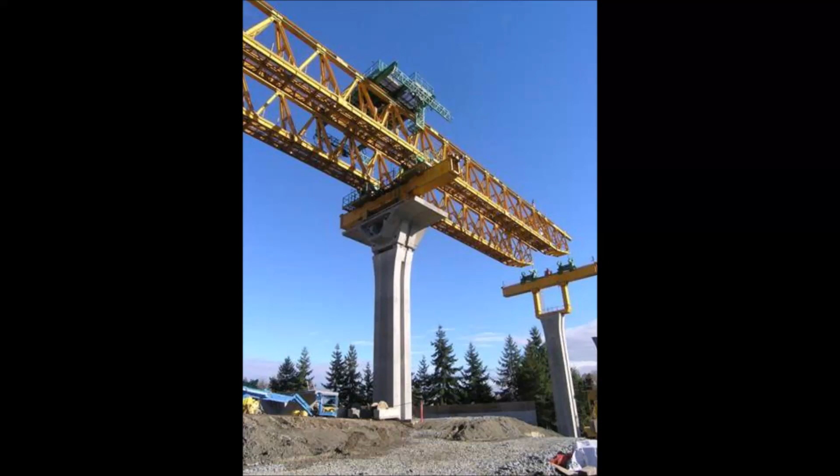We've built a lot of projects in this region, but never have we seen anything this dramatic on a day-to-day basis. That's the quote from Sound Transit Board Chair John Ladenburg, talking about the first precast segmental project in Washington State history, as well as the longest elevated roadway in the entire Pacific Northwest, coming in at 24,746 feet.

So PCL turned to a form of ABC, accelerated bridge construction, and they chose a self-launching gantry, which was the first time it's ever been used in the entire region.

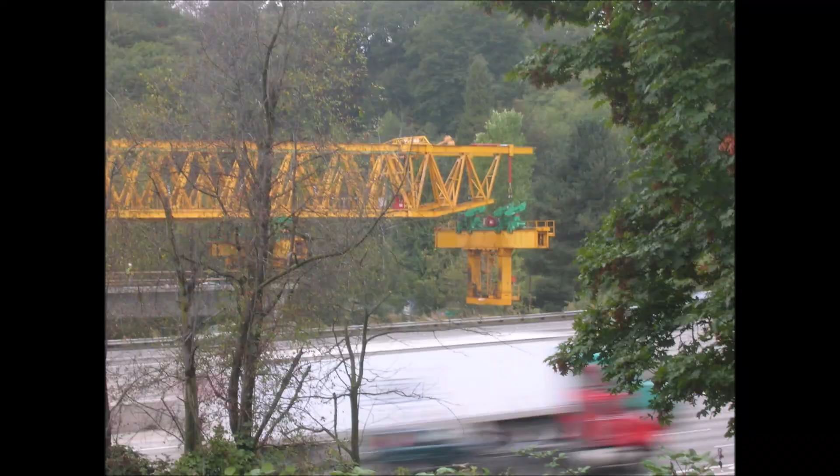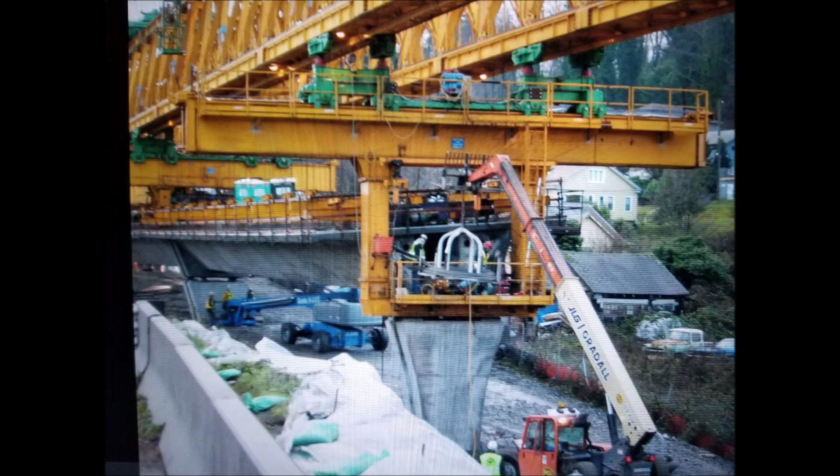The actual crane came from Italy. It came in 38 shipping containers, put on a cargo ship, and shipped across the Atlantic. It weighs, when it's all assembled, 500 tons, it's 375 feet long, 44 feet tall, 20 feet wide, and it can lift up to 80 tons.

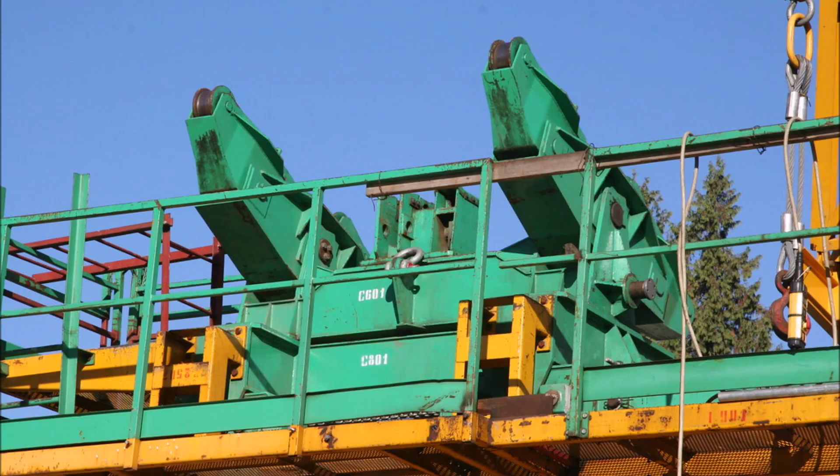PCL was awarded the contract with a bid of $231.7 million, which seems like a lot of money, but it's actually $40 million less than their biggest rival, Peter Kiewit, and 10% less than the estimates of the Sound Transit engineers.

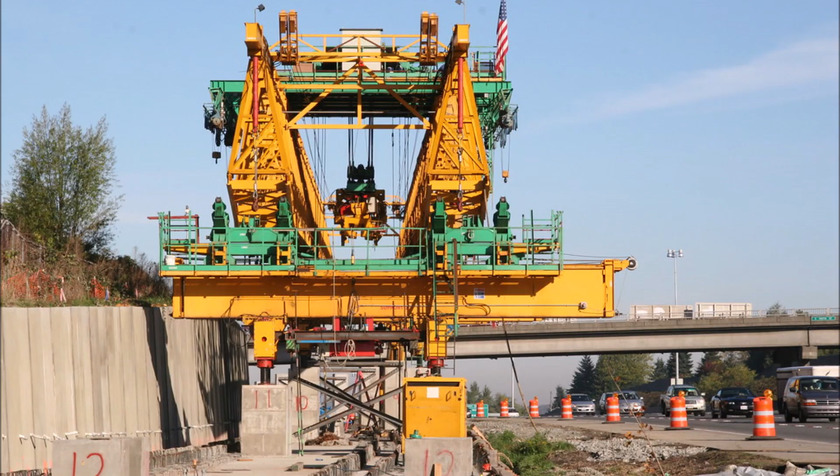T.Y. Lin, engineer, designed this thing with the typical 120-foot spans, which is simply 12 10-foot wide precast segments lined up and stuck together from column to column. So when the whole thing was up, it started walking across 170 columns, some of them as high as 70 feet, all along the 4.2-mile stretch between Tukwila Station and Rainier Beach.

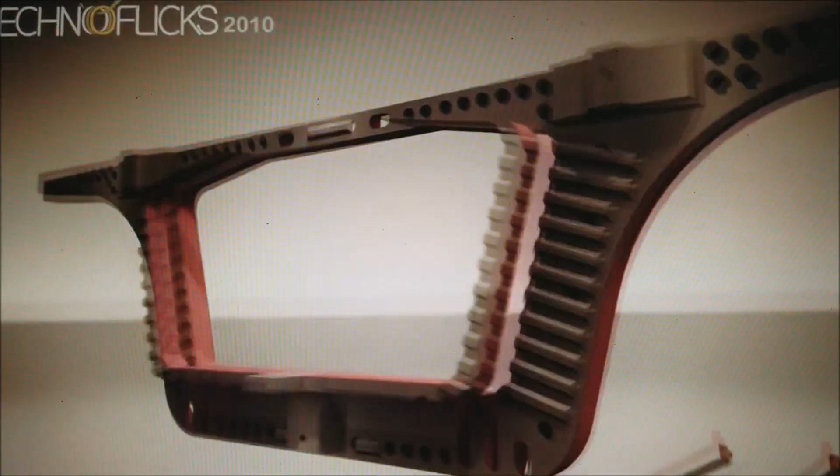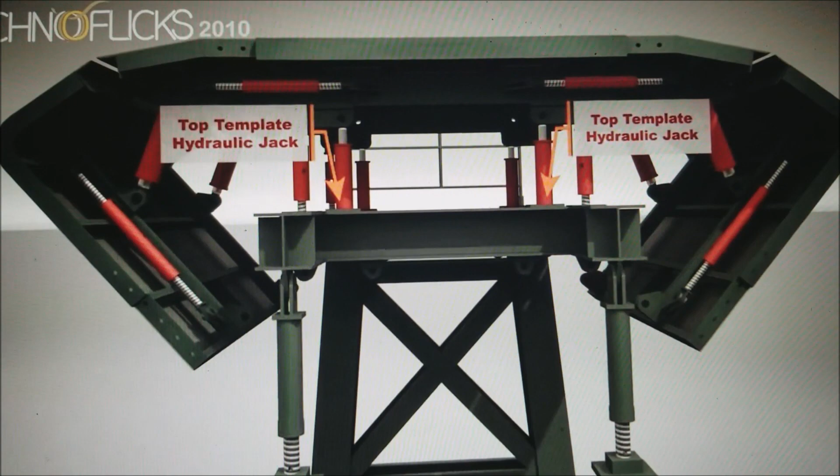Each segment weighs 35 tons, but it's lifted pretty easily by the 375-foot-long gantry, which is run off of a 10-person crew, typically, superintendent and 10 people. So when you're hanging a 120-foot span every other day, laying 4.2 miles of bridge in less than a year, there's a sense of productivity that's tough to rival in this industry.

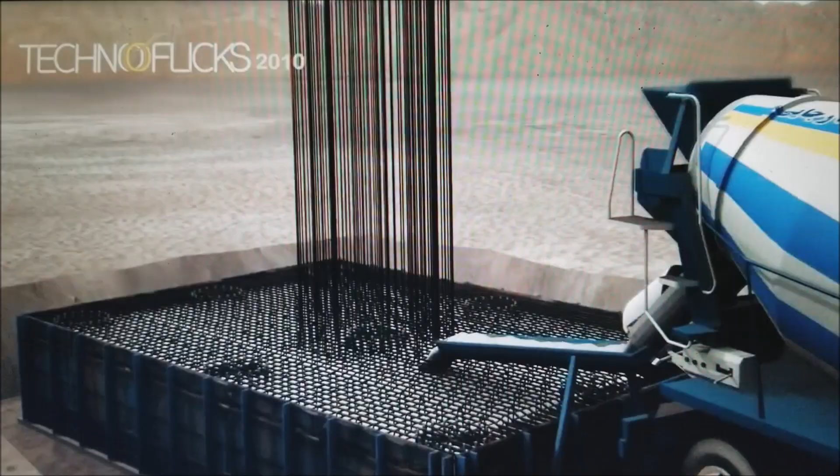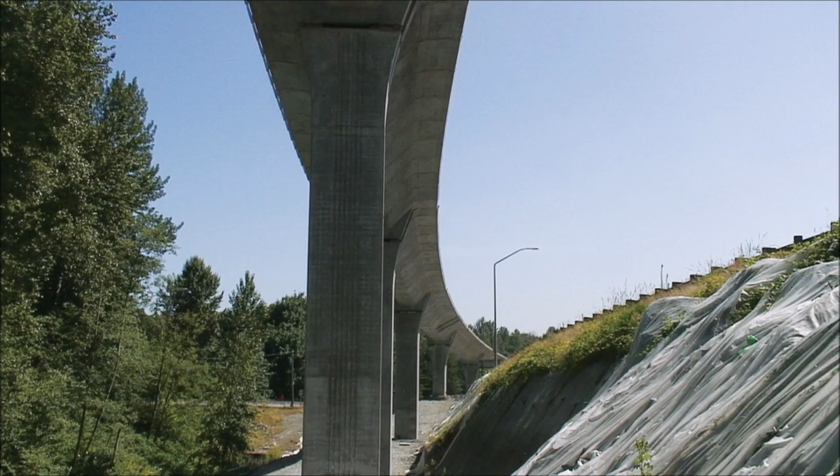They came up with PCL and Stoneway got together and they came up with a system, a bottom-up system with this real self-consolidating concrete, and it turned out really nice. Almost no sack and patch involved. We made up all the architectural features of the column.

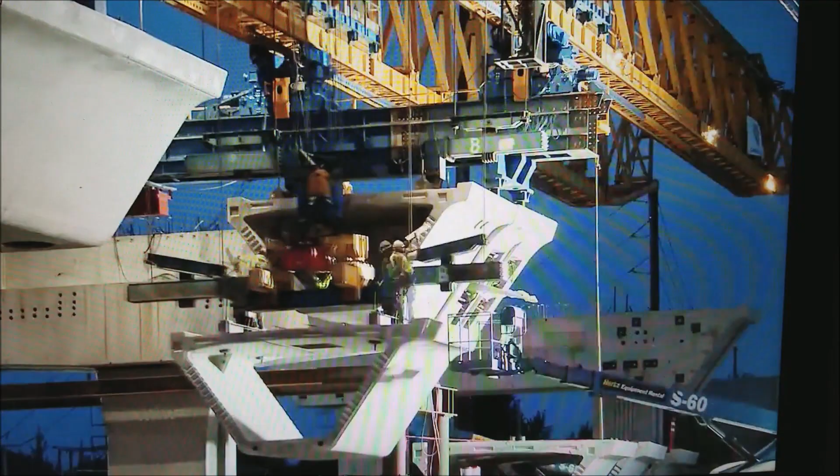The tragedy of the whole design is that you take a 7-foot tall segment, subtract an 8-inch top slab and an 8-inch bottom slab, and you end up with about 5'8", which, for the amount of work that has to be done inside of those, with all the temporary tie-in rods...

So when each segment is set, it's put together and then glued together with epoxy. One segment to the next, you start at the end, locking the first segment to the pier segment, and then constantly stuffing rods up through the soffit diaphragm.

It's a design only a chiropractor could love. But Bob McDonald, the engineer, claims the value engineering saved $23 million in 8 months off the project.

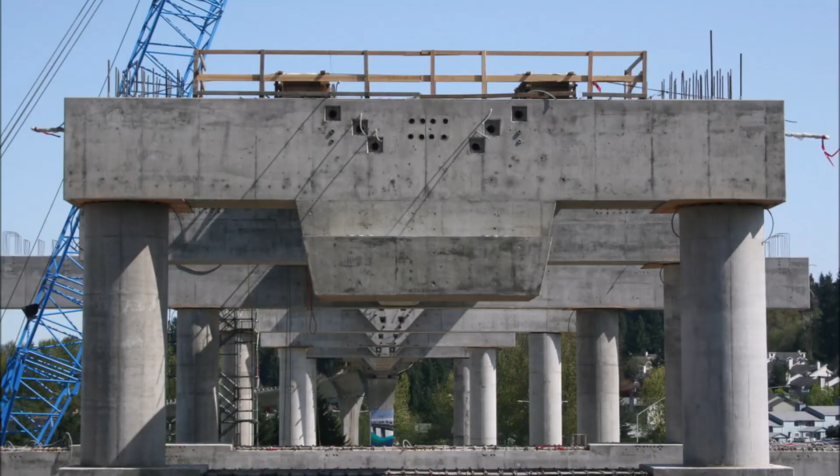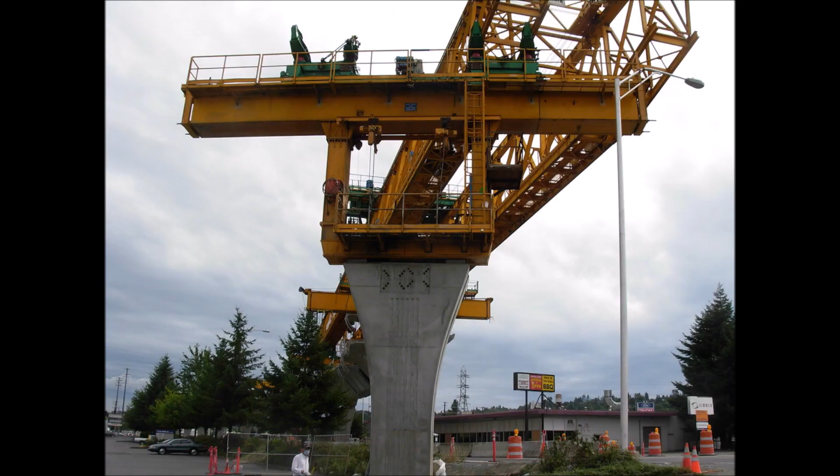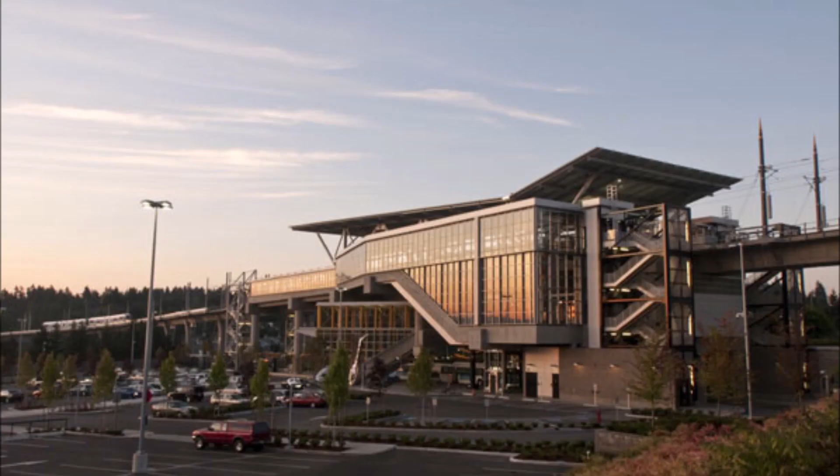The type of launching gantry used was a reciprocating overhead self-launching gantry with a twin girder overhead. The twin girder overhead gantry comprises 2 triangular trusses. They can also be an I-beam, which is heavier. It makes it so that all the joints can be machine welded. It can carry more weight, but it's also heavier.

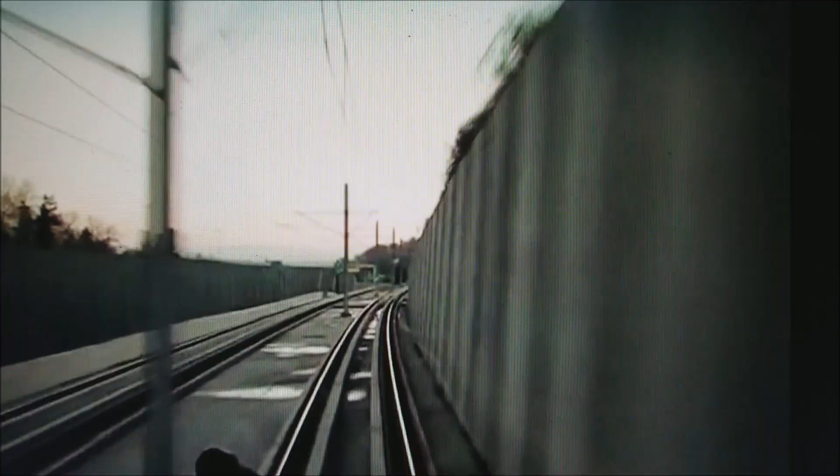So for this design, for the size of the segments, with a 35-ton segment as opposed to say a 100-ton segment, they use a twin girder overhead with 2 triangular trusses, and the connections have a modular nature. So it's easier to take it apart and reconfigure it if you want to go from bridge to bridge. Where it was used before, in Spain or Portugal, they wanted to reconfigure the design just a little bit to make the light rail work. The twin girder truss design really makes it easier. Just the modular essence of the whole thing makes it easier to reconfigure.

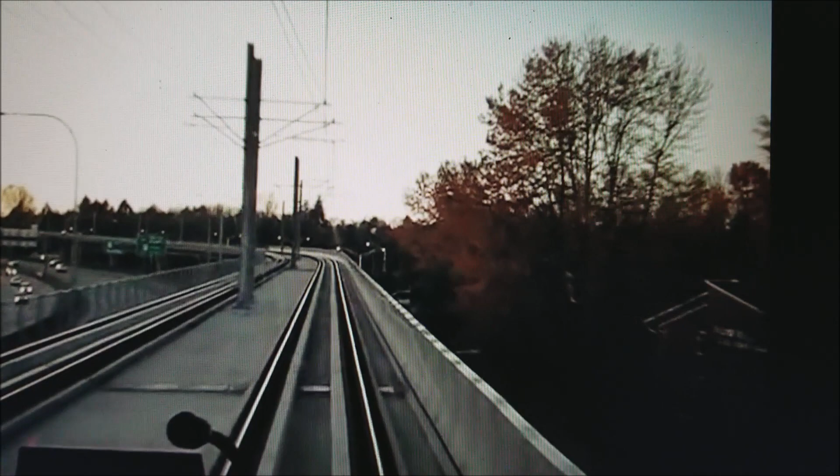It can't be overstated though how much this thing reduces the carbon footprint and overall impact to the congestion of traffic in local communities. And maybe first and foremost is just waste. To anybody who ever works in the construction industry and sees the amount of waste they throw away, to something this clean, we're really taking a glimpse of a sliver of what the future of the industry might look like.

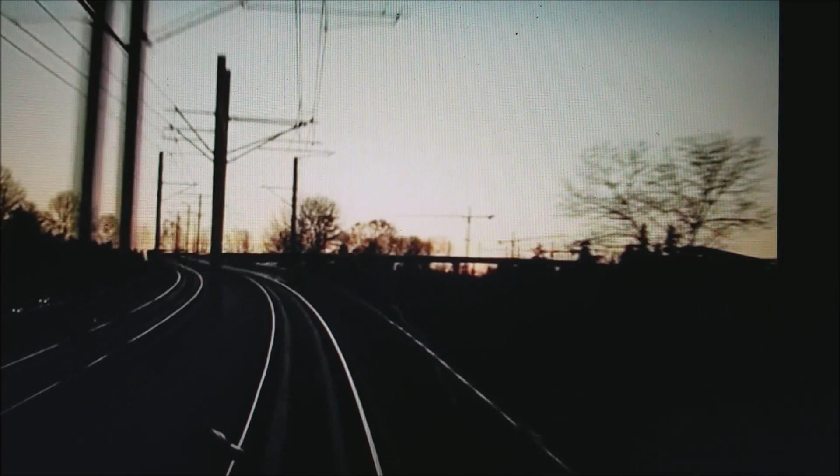The whole thing was finished on time and under budget, with really, for the size of the thing, hardly any problems. A couple of mechanical issues that had to be addressed, stopped for a day or so, and a fine for insufficient stormwater drainage. Also, there was a $3.7 million lawsuit by the workers against PCL for trying to skip over the prevailing wage pay, but that's a whole segment of its own.

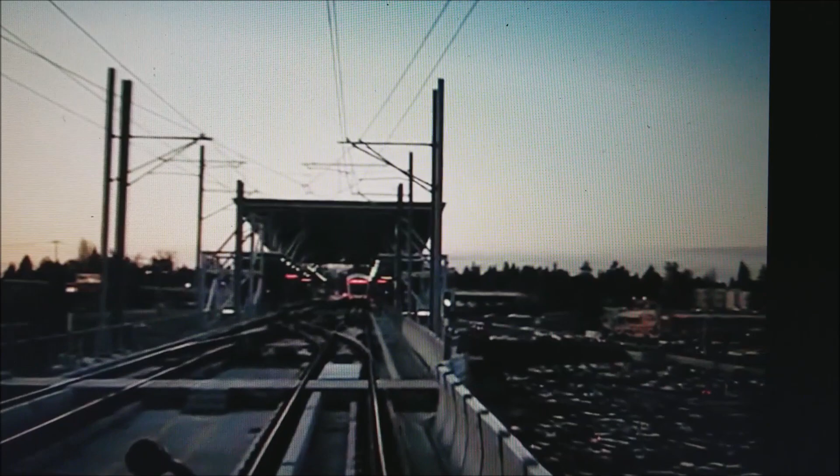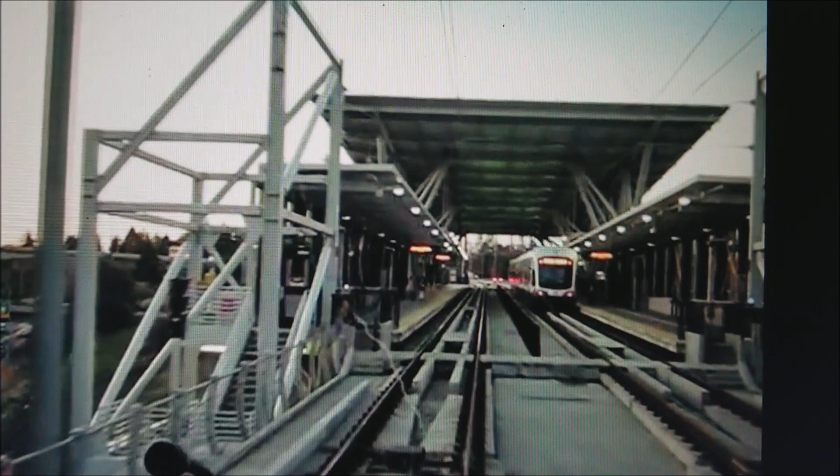When all was said and done, this thing became the vanguard, the initial segment of a 16-mile stretch between SeaTac Airport and Westlake Center in downtown Seattle, which is just the beginning of a sprawl of light rail and train infrastructure across the region, which is always going to be debated in bars and taverns across the state. But just like they called Eisenhower a loon and crazy when he had the idea to come up with the interstate highway system, back when people told him nobody would ever use it, the light rail is just going to keep growing.